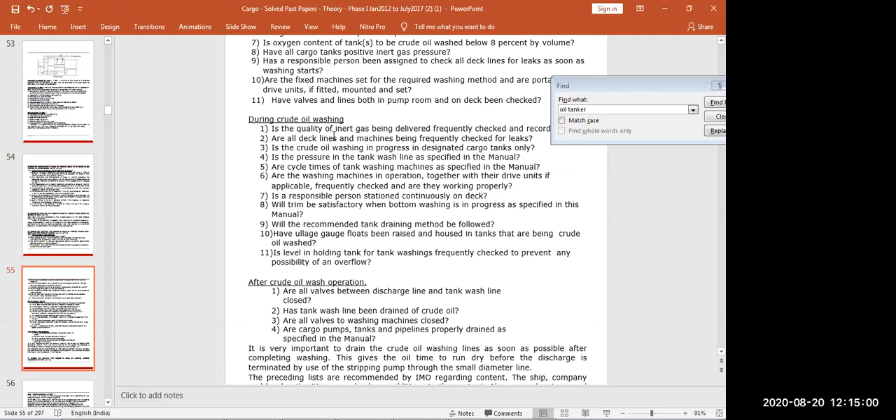Oxygen content, tank, pipeline leakage, inert gas, all these things are there. Then during crude oil washing, again inert gas, pressure, lines check, start slowly. After crude oil washing, closing and securing and stripping and draining.

Then hazards associated with crude oil washing: oil leaks, then can be explosion, inert gas, contamination and overflow. Again, the checks during and after crude oil washing.

Then you are chief officer of crude oil, explain the proper sequence of discharging and crude oil washing. So discharging, we have seen in brief. First, we arrive at the port, all information exchange, ship shore safety checklist, berthing, then general safety checks, all pipelines, alarms, leakages, pressure test of the line, gas meters, all paperwork, cargo documents. Then special attention has to be given to monitor the safe running of the pumps, pump room ventilation, pump room checks.

So pump room we have to see. Then drips and leaks in the pump room should be attended to immediately. Pump room bilge sounding should be monitored regularly. After completion of gauging,

sampling calculation, the terminal will give the readiness for receiving the cargo. So cargo sampling will be done before discharging. Then lineup checked, steam turbines checked for COPs, IG plant running. All these are discharging procedures.

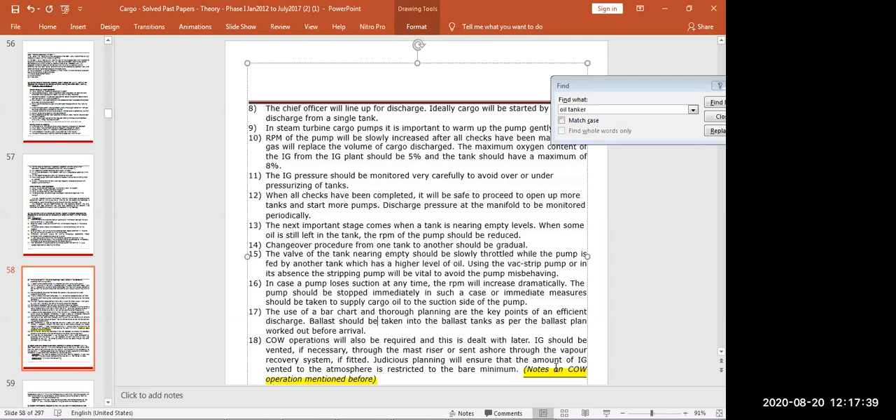Then there is a bar chart, we saw in that. This bar chart is showing which ballast and pumps are running at the time, and crude oil washing as required in the above checks. Then what is open cycle and closed cycle?

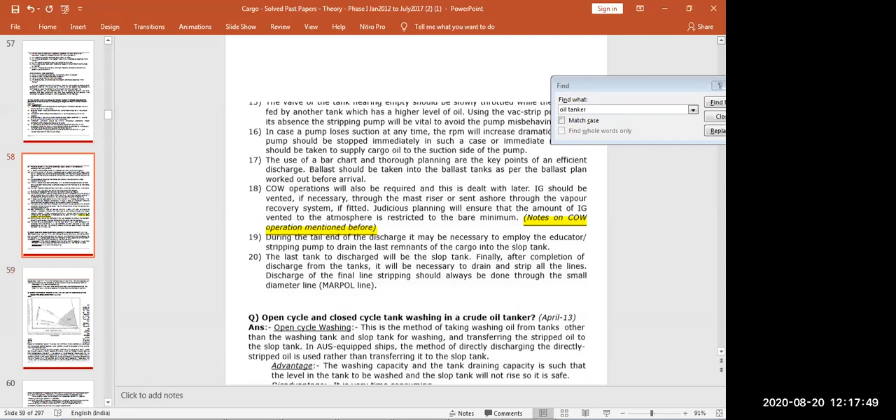Open cycle is vapor is vented in the atmosphere. Advantage is that washing capacity is increased.

Open cycle is venting in the atmosphere with the automatic unloading stripping system. So the gas is extracted. We will see when we are seeing pump room, what is this AUS system. The advantage is when you are washing the tank, the washing capacity and tank draining capacity in the tank to be washed and the slop tank will not rise. So it is safe, but it takes a lot of time.

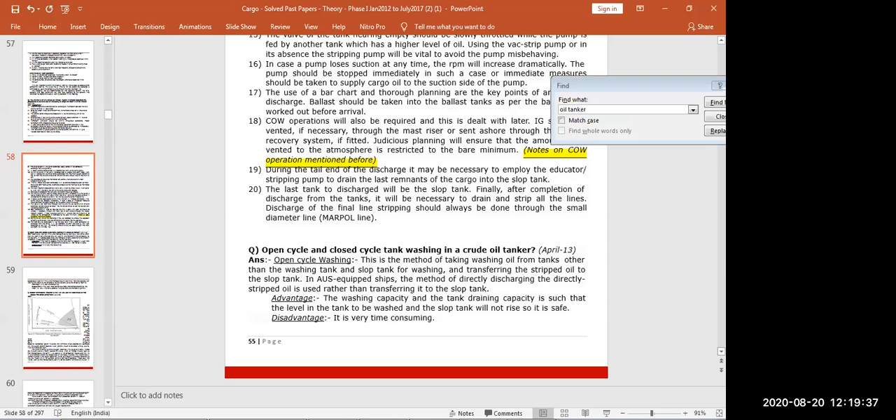So what is open cycle? Taking washing, you wash all the oil tanks from one tank and you put all the washing in other tank, and finally you collect all the washing from one tank, and put it in the slop tank, and then from the slop tank all the cargo goes through the automatic stripping system where it is stripped to shore. So this is open cycle.

So it is time consuming, but good washing and drainage is done. Closed cycle is a method of taking washing oil from the slop tank for washing and returning the stripped oil to the slop tank using the stripping machine. In open cycle, you were taking the crude oil from another tank, doing crude oil washing, and putting it in other tanks and finally the slop tank. In closed cycle, we are taking the cargo from the slop tank, doing the crude oil washing, and whatever residue is left, we put that also in the slop tank. Advantage is less time, but the wash water cannot be directly transferred ashore because there is a lot of water and oil in the tanks.

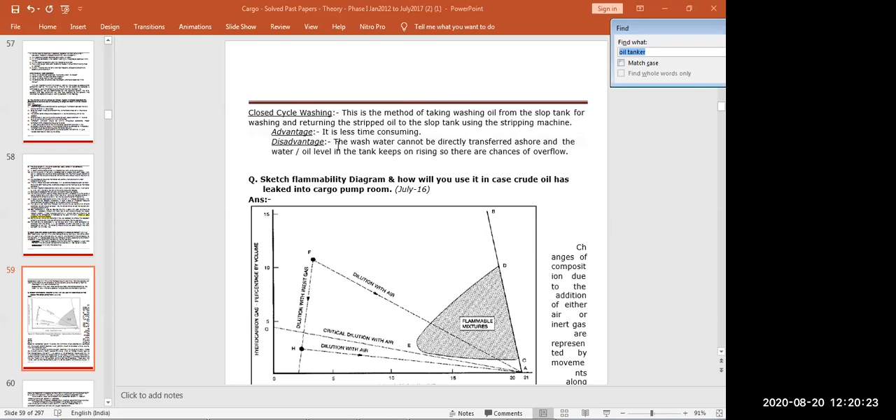That problem - the flammability diagram we have done.

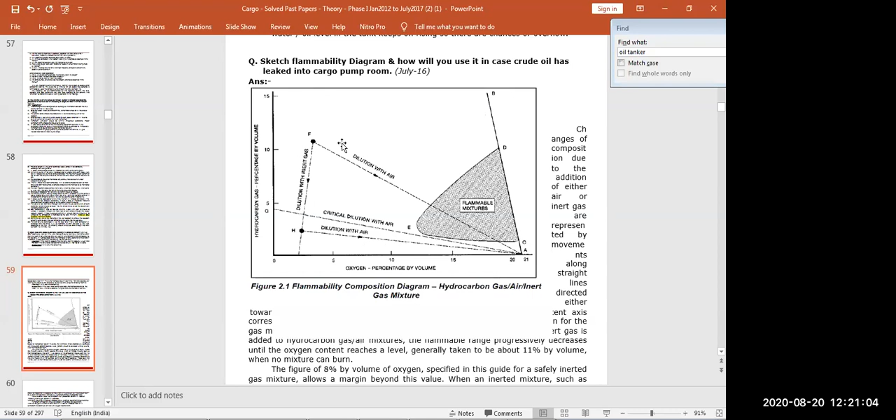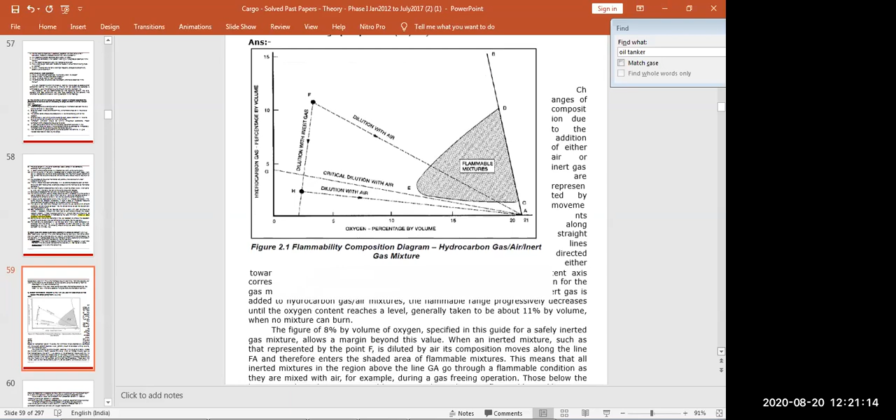So how will you use it in case you have a leak in the pump room? If you have a leak in the pump room, you will have a very high hydrocarbon content. So we will check the gas, and immediately start the ventilation, and if whatever cargo is there we remove it using the bilge pumps. And if anybody is there, we will not allow entry because we can enter the flammable range, so we will avoid any sparks or anything, and keep checking the gas and keep ventilating till the oxygen or gas level is reduced, and stop the cargo operation.

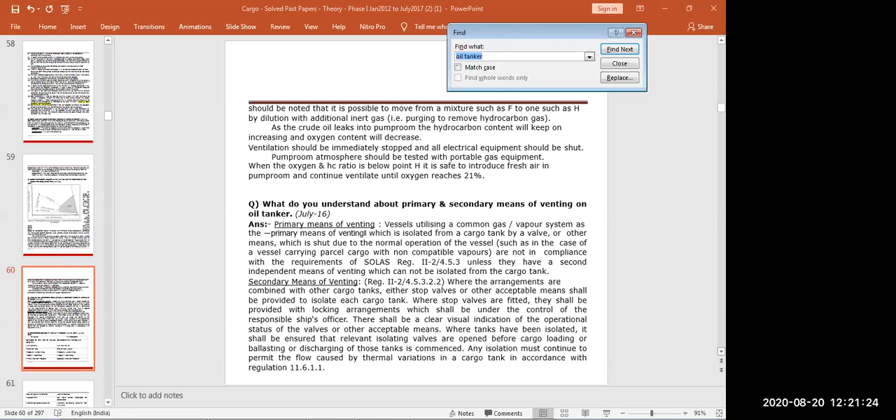Then the primary and venting system we saw just now - what are the primary and venting systems? Then PV breaker and PV valve.

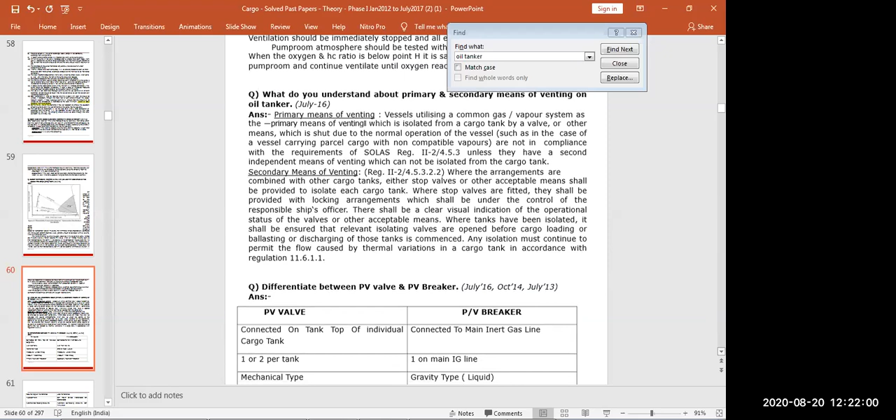Then the difference between PV valve and PV breaker - we have seen the PV breaker and PV valve, but if you want we can see again. PV valve is connected on top of each tank, PV breaker is in the common inert gas main line. You can have one or two PV valves per tank, but only one PV breaker on the full IG line. PV valve is mechanical type, PV breaker is gravity type, filled with liquid water, as we saw in the inert gas system. PV valve pressure is 1400, PV breaker pressure is 2100 millimeter of water gauge. PV valve vacuum side is minus 350, here vacuum is minus 700.

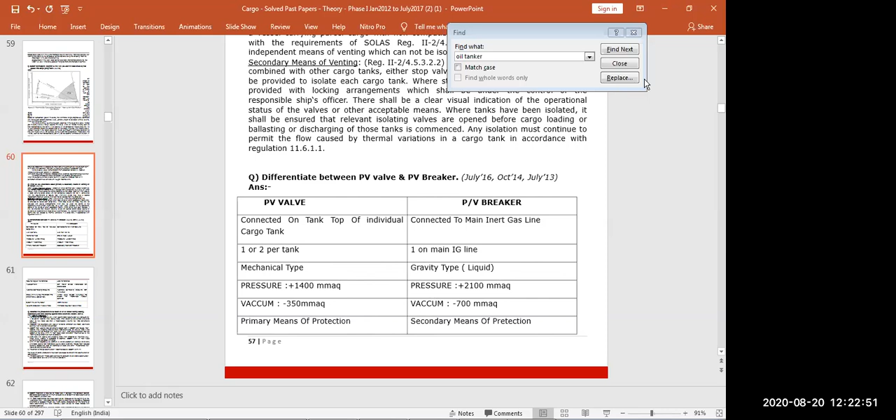So the PV valve will always lift first; if it is not lifting, then the PV breaker will lift, as you can see it has a higher pressure setting. PV valve is the primary means of protection. PV breaker is called secondary means here, but as per the definition of secondary means, other action shall be provided.

PV breaker is the first safety device of the IG system, but it's not the secondary means. For IG it can be, but for the tank, as you can see here, it should be able to isolate each cargo tank - it should be independent. But with the PV breaker, you cannot isolate each cargo tank, so it is not a secondary means.

They shall be provided locking arrangements and clear visual indication of the operational status. Where tanks have been isolated, it shall be ensured that the relevant isolating valves are open.

So the second PV valve or your sensors are your secondary means of protection. PV valve requires regular maintenance, PV breaker requires less maintenance.

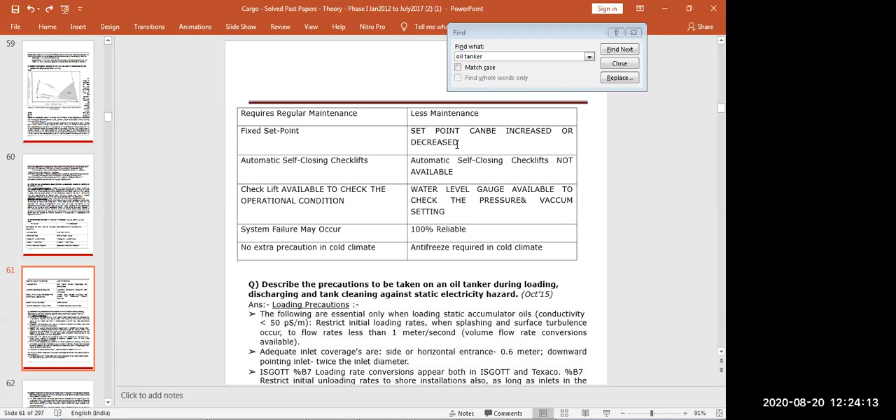PV valve is at a fixed set point, PV breaker's set point can be increased or decreased as per the water level. PV valve has an automatic self-closing check lift - if pressure is not there, it will close automatically. PV breaker will not close by itself; it does not have that, so you have to fill the water if it is drained out.

Then the check lift available to check the operational condition - in the PV breaker you have the water level gauge to see the operating condition. PV valve system can fail because it can get stuck. PV breaker is 100% reliable because it's all water - if pressure is increased, water will pump out. So it's very simple.

For PV valve, no extra precaution is required in cold climate. In PV breaker, we add antifreeze glycol in cold climate.

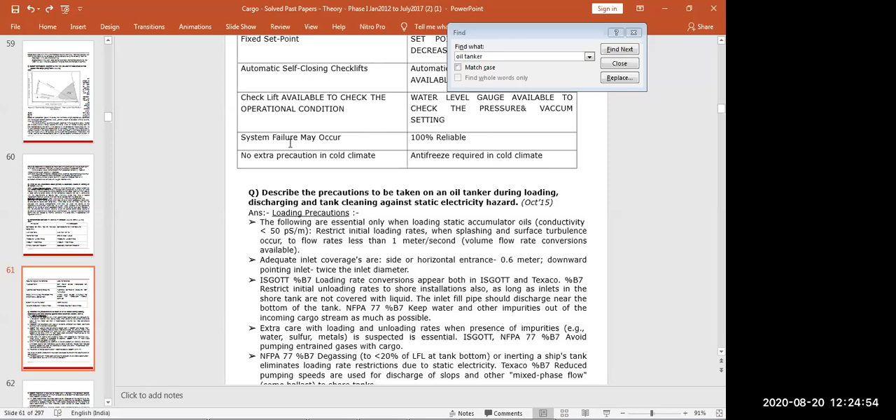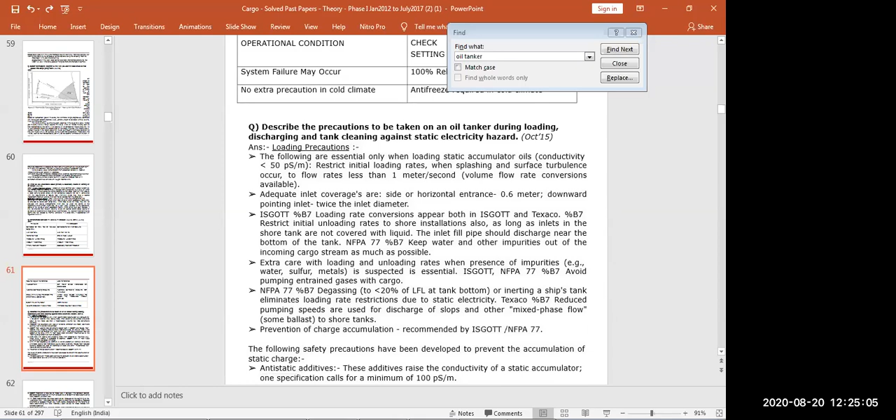And precautions during loading: we have to see static electricity precautions for accumulator oils less than 50 picosiemens, start slowly at 1 meter per second, then sampling, hose size, then loading rate, maximum loading rate 7 meters per second.

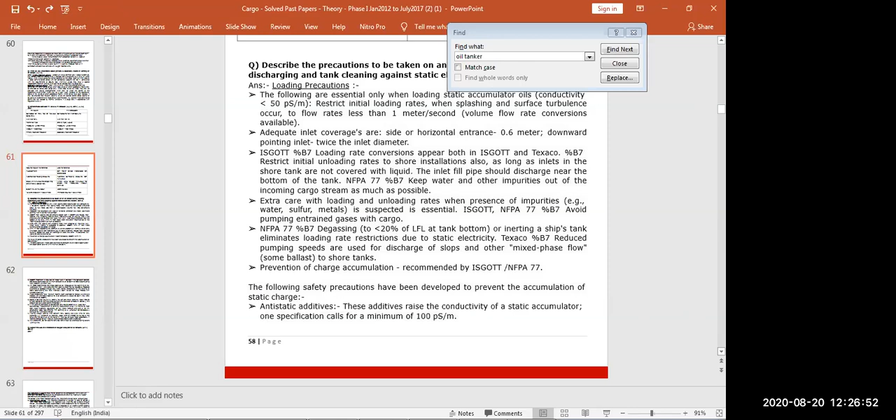Then you have to know the density of the oil, and the people operating should be well skilled, with good earthing, and settling time after 30 minutes after loading is finished. And in bad weather or lightning, don't do full rate of discharge, reduce the rate.

And for oxygen analyzers, we have paramagnetic sensors or electrolytic sensors, two types. Paramagnetic sensor works on magnetic properties. A metal body is suspended in a magnetic field, and when the gas is drawn through the cell, the suspended body experiences magnetism. So there is a metal which experiences magnetism in the presence of oxygen, and the amount of oxygen present determines how much magnetism will be there, which is measured.

Electrolytic sensor: current flows because of electrodes with the electrolyte. More oxygen means more current flows, less oxygen means less current flows, and based on that we get the readings.

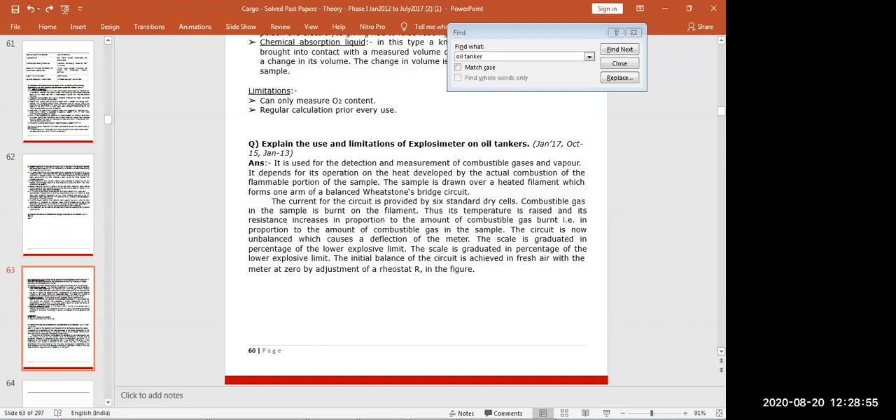Then explosive meter. What is the limitation of the explosive meter? We can use it only when oxygen is more than 11%, that is, we cannot use it in an inert atmosphere. We will use it when we are doing gas freeing.

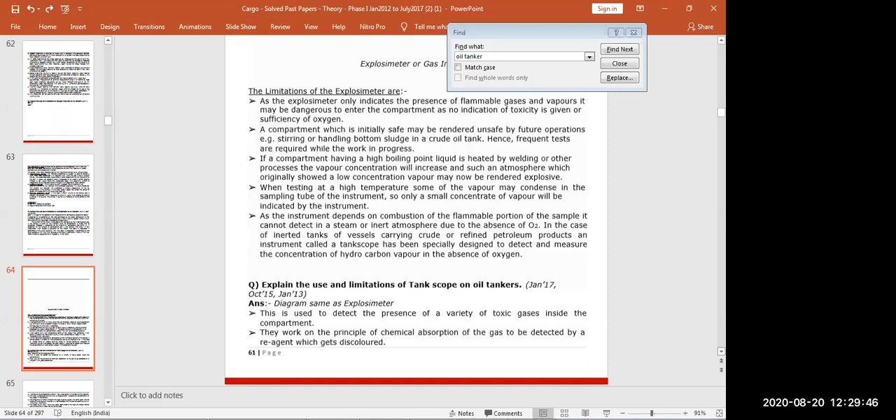Yeah, we need tank scope. This is the tank scope which we will use for inert atmosphere.

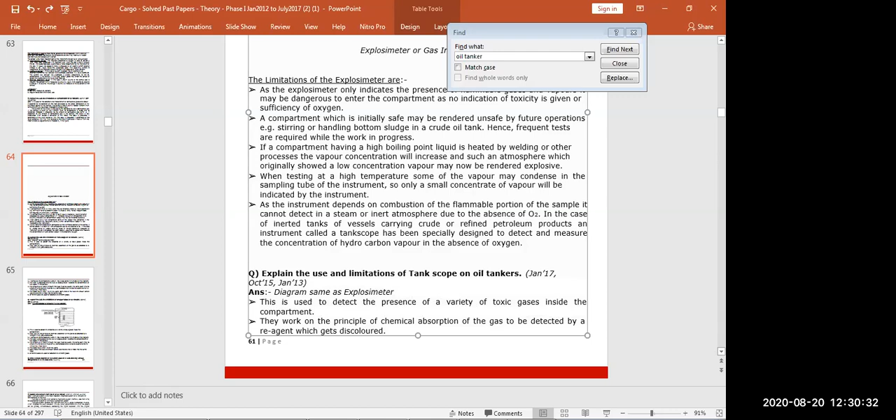So tank scope works on Wheatstone bridge, chemical absorption.

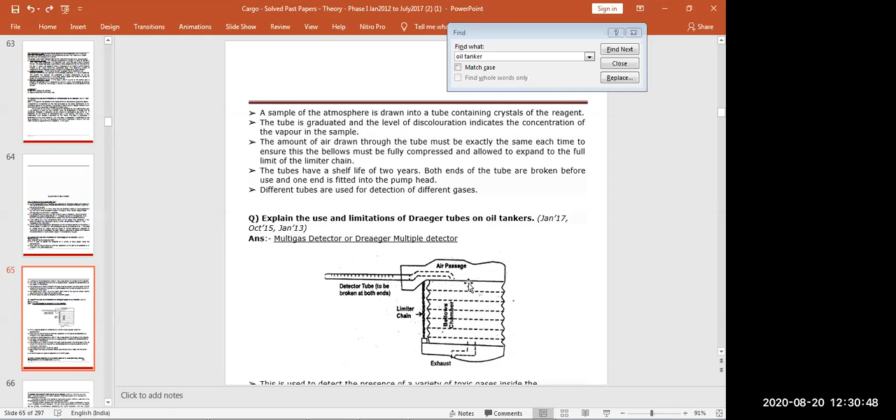So this is different. Then explain the limitations of the Draeger tube. So with the Draeger tube, you put it in the pump, and measure the number of pumps, and you get the discolouring and color change and all.

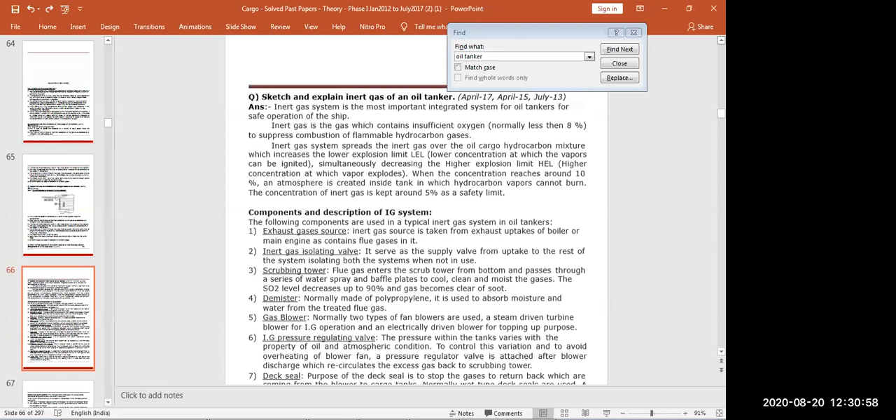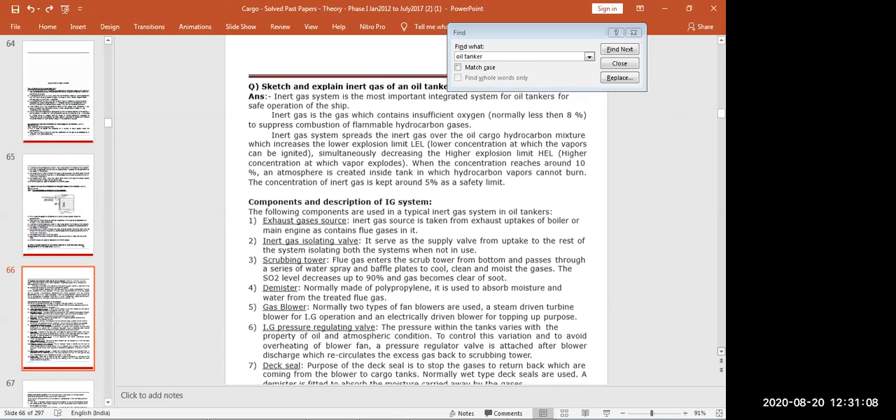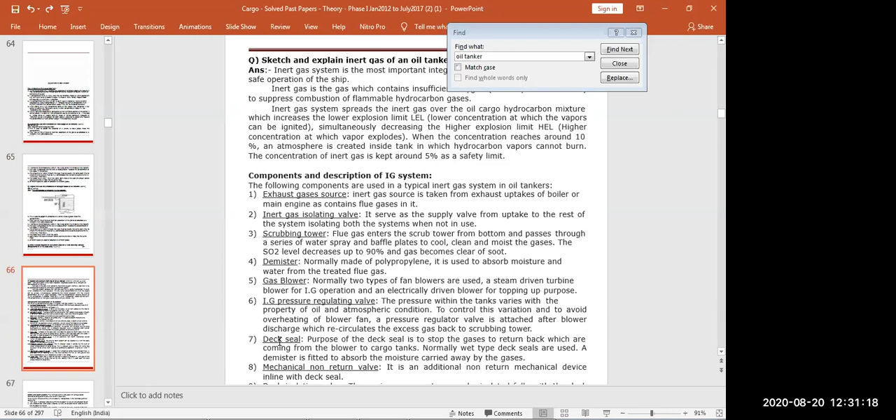Then block diagram of IG system, you were asking about a VLCC, and all the components. So first we have to name all the components like this: exhaust gas source and valve, boiler, isolating valve, scrubber, demister, gas blower, fans, IG pressure regulating valve, deck seal, then non-return valve.

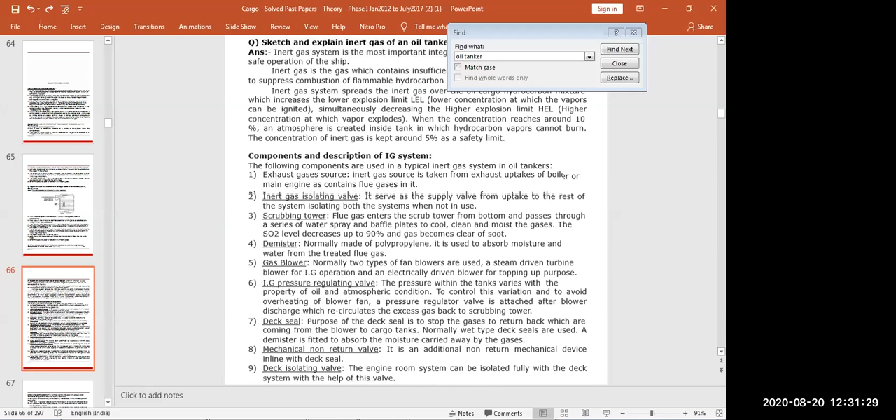Then deck isolating valve, PV breaker, cargo isolating valves, and last is the mast riser.

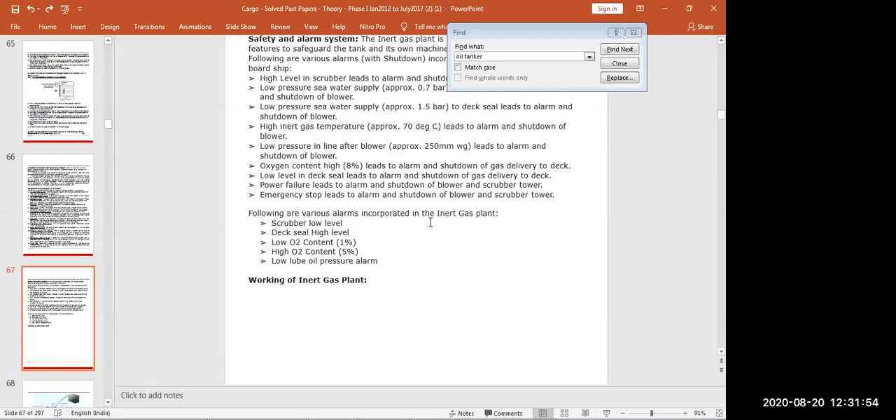Then the alarm system, which we saw: scrubber water level high and low pressure, blower shut down, low pressure inert gas, high temperature, low pressure in the line after the blower, oxygen content high, deck seal high and low water level. So all these are alarms of the inert gas system.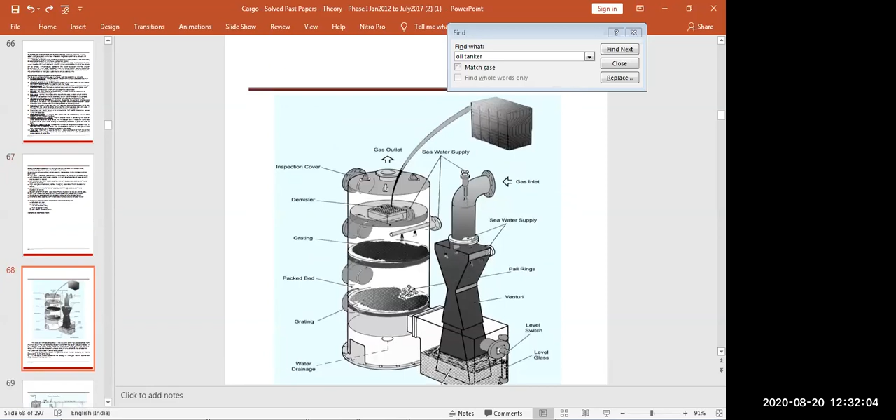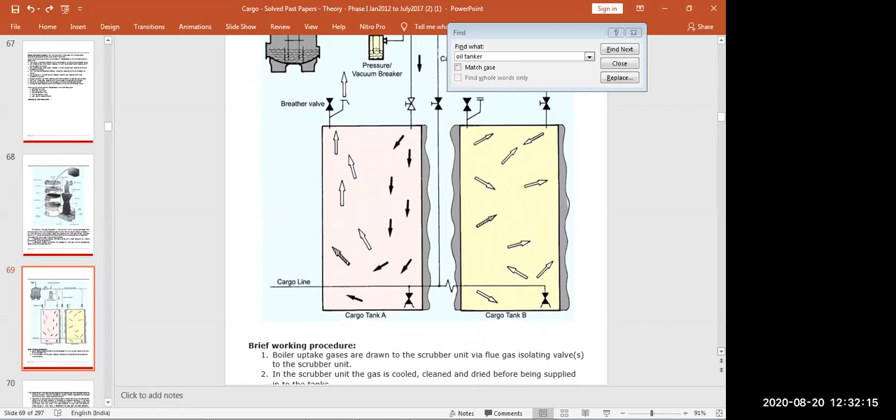So this is the diagram of the inert gas system and its explanation. Inert gas is going into the tank after the PV breaker. Then the full explanation, and then the hazards of this, this is...

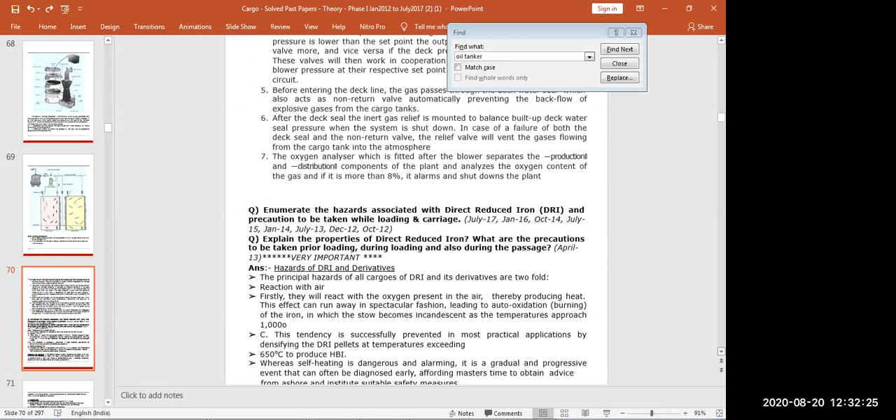Also there is an oil tankers question: what is dirty ballast? If the discharge is composed of seawater and discharge from fuel tank, so if you take ballast in a fuel tank, or seawater in a fuel tank for the stability of the vessel, that is your dirty ballast. Maybe in fuel tank or...

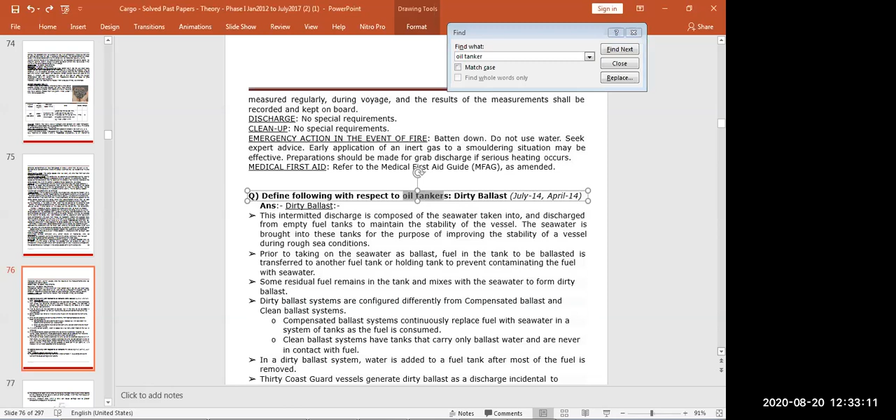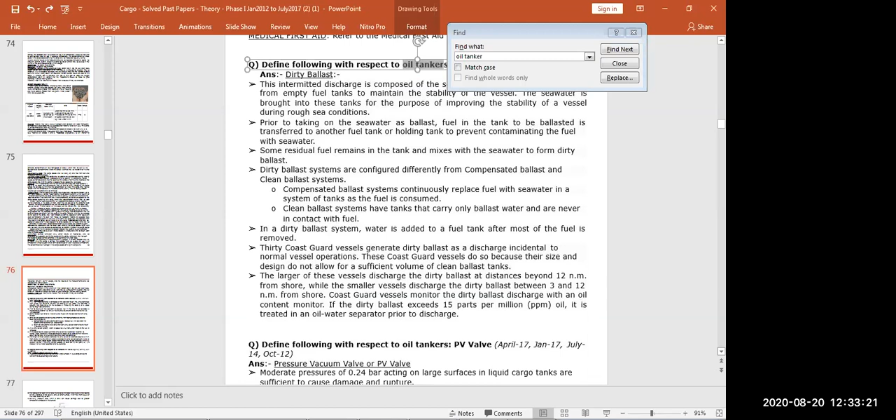Then, what is a PV valve? This we have to see. The PV valve is operating at 0.24 bar pressure,

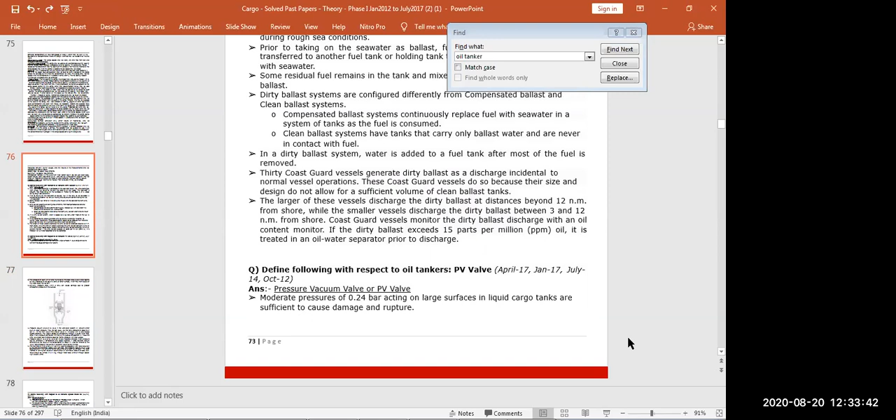sufficient to cause... This is a PV valve operation. There is a seat with the spring and you have a weight, so this weight will get lifted. We will see a better picture. So if the pressure in the tank - this is connected to the cargo tank - if pressure is increased, this valve will lift and the pressure air will release.

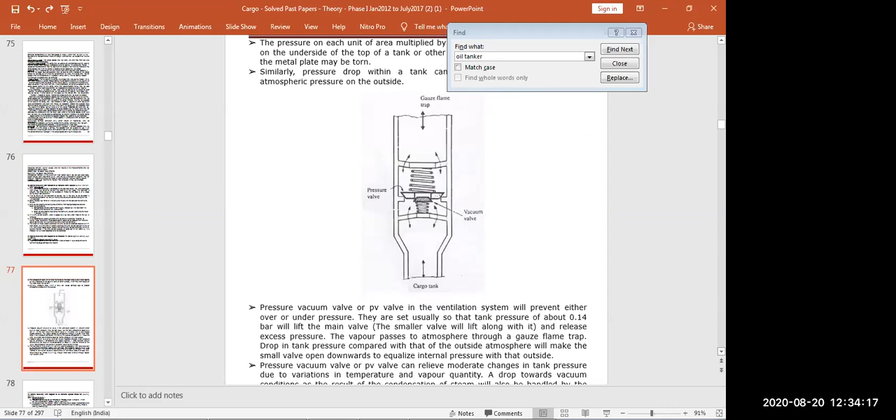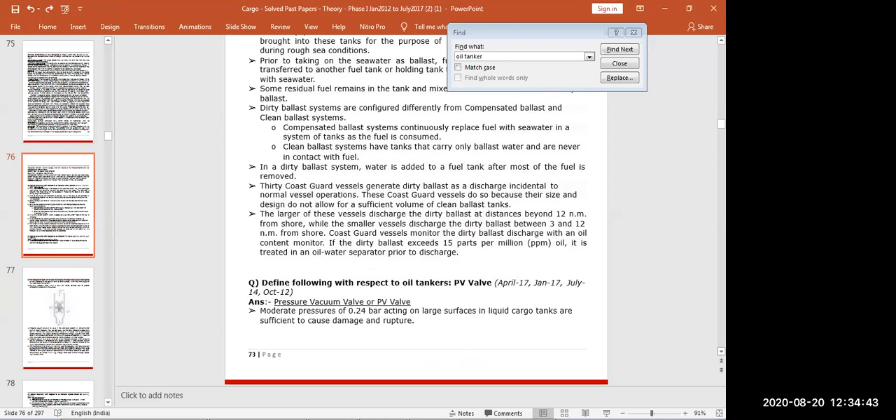So if in any tank you have more than 0.24 bar pressure, the tank will get rupture. So before 0.24 bar, your PV valve should lift. It should lift before 2400 mm.

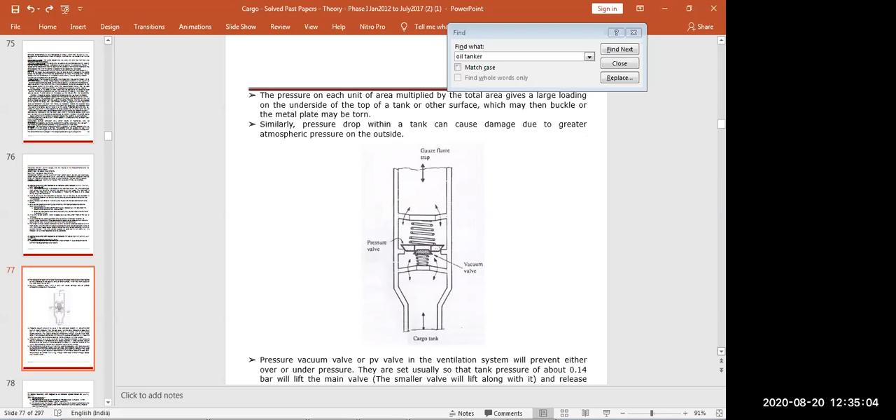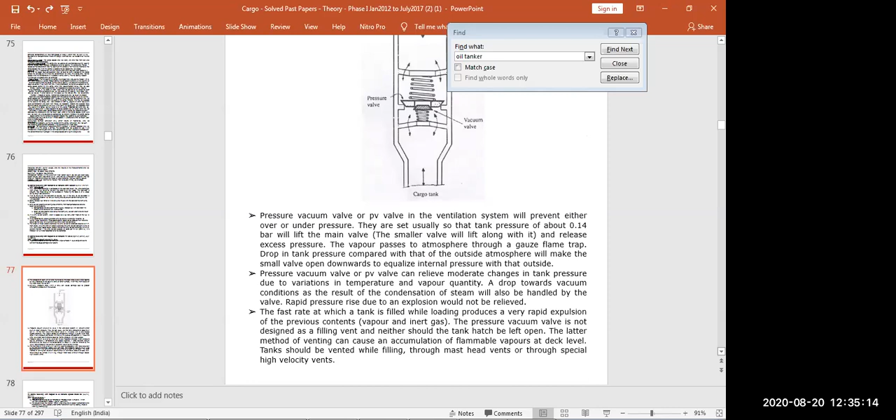So PV valve is a part of your ventilation system, to avoid rupturing of the tank.

Then what is spike crude oil? Spike crude oil is enriched oil or tailored crude oil, which has more hydrocarbon added in gas or liquid form. So extra hydrocarbon is there, better to improve the quality or something. Large amount of added hydrocarbons and it has got heavy gases.

Then sour crude oil. Sour crude oil has more hydrogen sulfide. When the total sulfur is more than 0.5, it is called sour crude oil, and if it is less than 0.5, it is sweet crude oil. So nowadays we require less sulfur, so if we need better quality oils, we have to purify the sour crude oil to make it less than that sulfur content, and that is called your sweet crude oil when it has less sulfur.

Because sulfur is harmful to the environment and causes global warming.

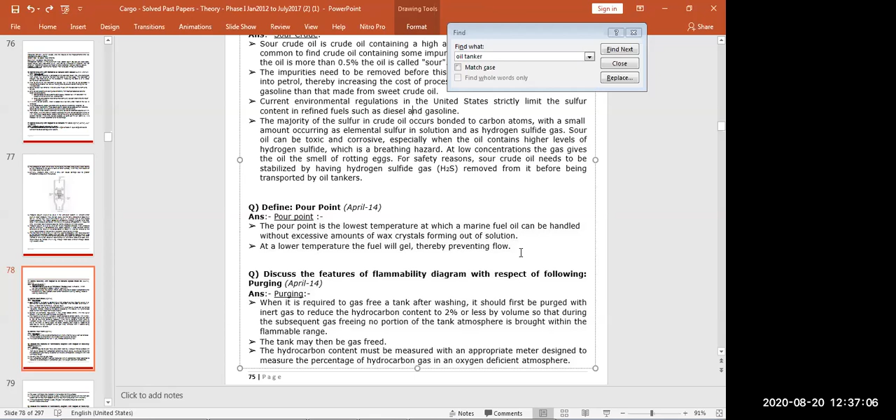And pour point: when any substance at that temperature starts flowing from the waxy state, is the lowest temperature at which oil has excessive wax forming out of solution. At low temperature the fuel will get thick, thereby preventing the flow. So if the temperature is lower than the pour point, the liquid will not flow.

So, the flammability diagram.

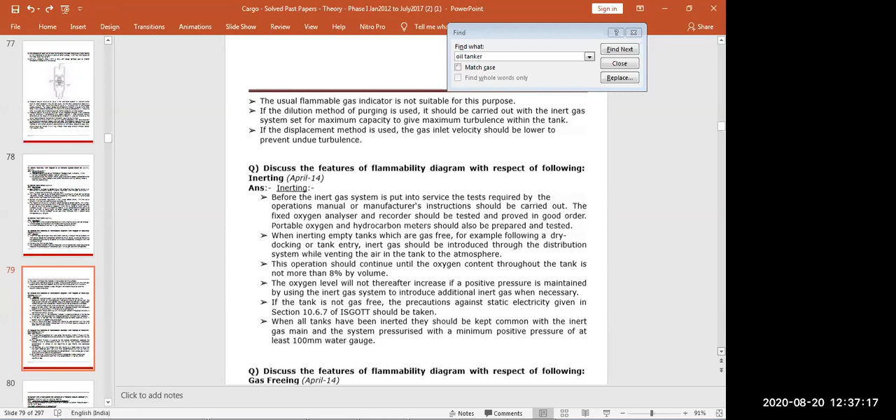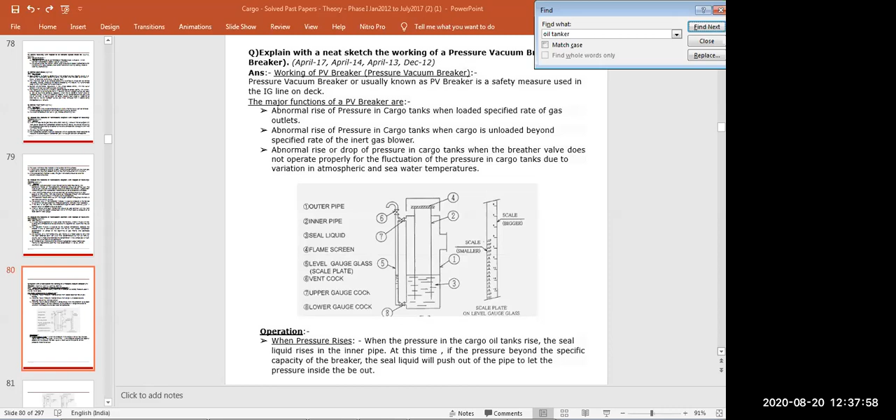So the PV valve we have already seen - PV breaker, sorry. So, how it is the same.

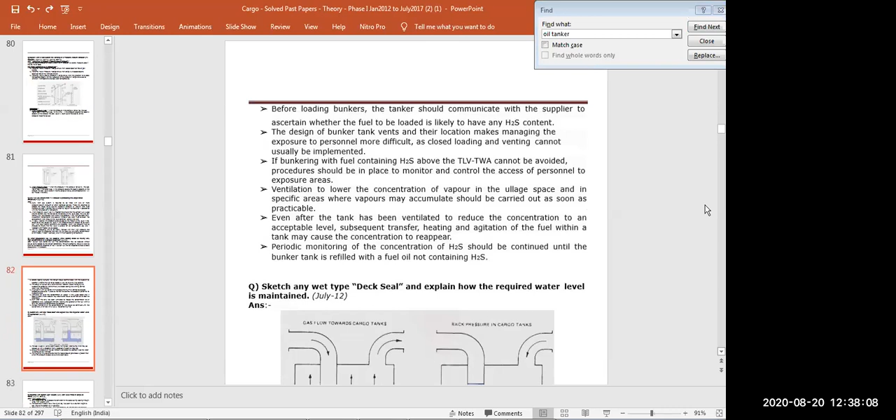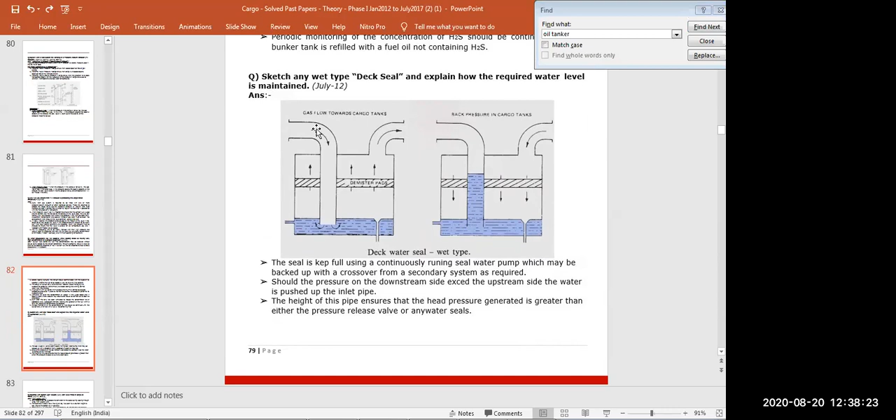Then deck seals. This we had to do. So good, we come here. Different types of deck seal. First is this one, the wet type of deck seal. Wet type means gas is passing through water. Mostly this one is used, we saw it in the video also. So inert gas is coming and it is passing through the water and getting cooled down, and the gas is going to the cargo tank.

Now if there is backflow, the gas is coming back. So you have the demister pad also, so that if gas is going, moisture is absorbed. When the gas is coming back, because the gas is lighter than water, it cannot push through the water. Some water it will push, but it cannot pass through the water. So it will push the water and this tube will be full of water, so gas cannot go back. This way the wet type deck seal is preventing the backflow.

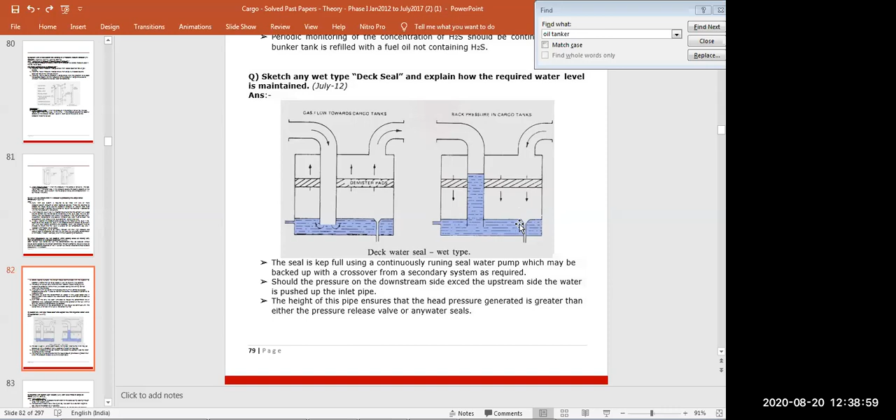Then the high velocity vent valve. This is the design. The requirement is that the velocity should be at least 30 meters per second - the shape should be such that air is going up to 30 meters per second, and the height of the PV valve should be at least 6 meters. So with this calculation, the fumes which are coming out will be very high and will not come onto the deck.

Tank vapors can be released and sent clear of the deck. Main thing is high velocity to avoid air accumulation on the deck.

This is a moving orifice type PV valve, and this is the counterweight. You can see the moving orifice and fixed cone or counterweight. There is a small gap between the orifice lip and the counterweight.

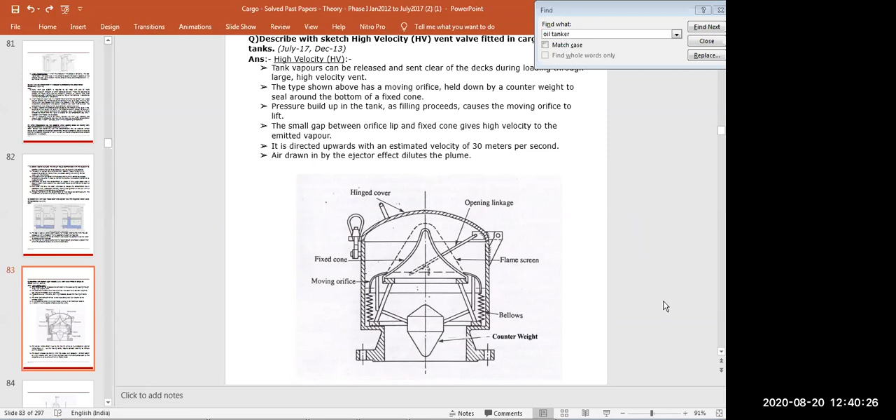It is directed upwards with velocity 30 meters per second, and air is drawn in by the ejector effect. This way the gas is passing.

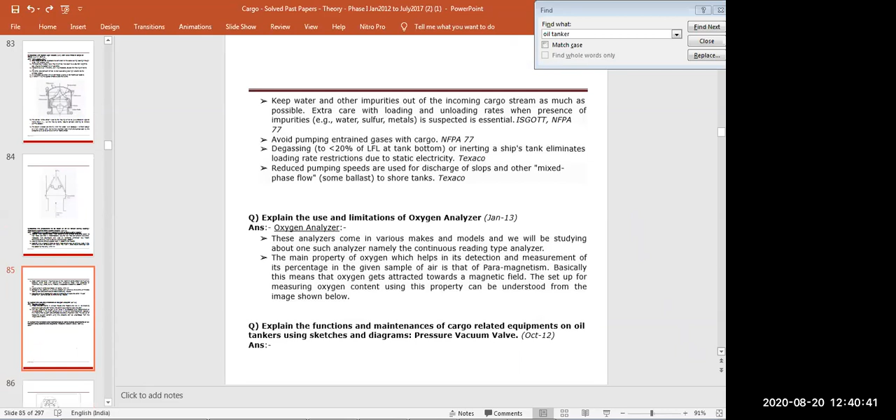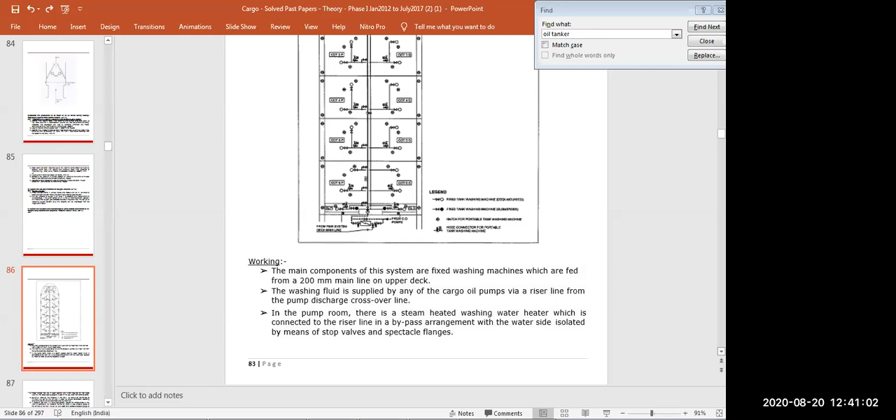Precautions for loading, gas charging, oxygen analyzer, cargo related equipments. You have ODME and the pipelines. Then function and maintenance of cargo related equipments.

ISGOTT - this is what we were going to do. That's the last topic we ended. So sometimes you are asked to write short notes on ISGOTT, or what is ISGOTT.

The latest edition of ISGOTT is the 6th edition, with many new amendments, 2020 edition. It was first published in 1978. It is a guide - not mandatory - for safety of oil tankers and terminals: International Safety Guide for Oil Tankers and Terminals.

It is divided into 4 parts: one part is for the tanker, one part is for the terminal, one part is for port and terminal interface, and the fourth part is for other safety aspects. It is published by OCIMF, Oil Companies International Marine Forum, and ICS, and one more, IAPH.

As per ISM, it lists all the safety measures for loading, discharging, tank cleaning, venting, sampling, static electricity, gas meters, cyber security, and work permits. All these things are given in your ISGOTT. Any work, any aspect of safety of oil tankers is given in ISGOTT.

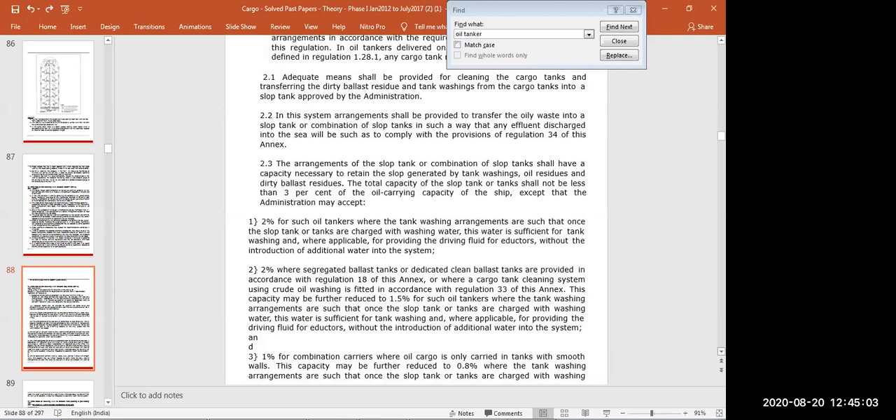Yes. Yes. Shyam? Yes sir.

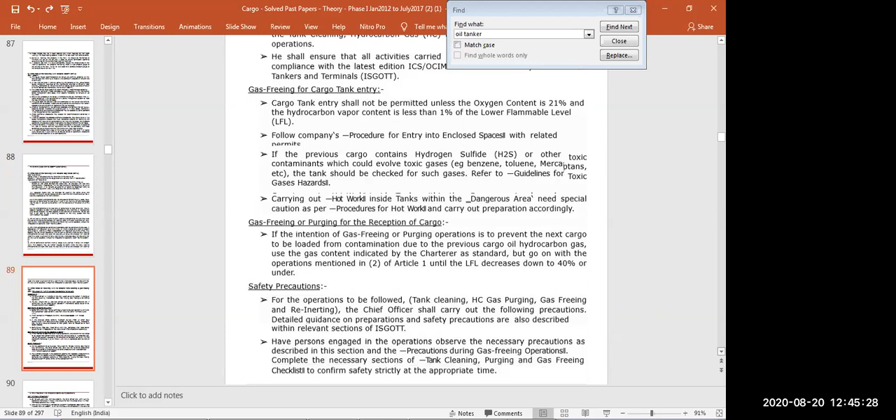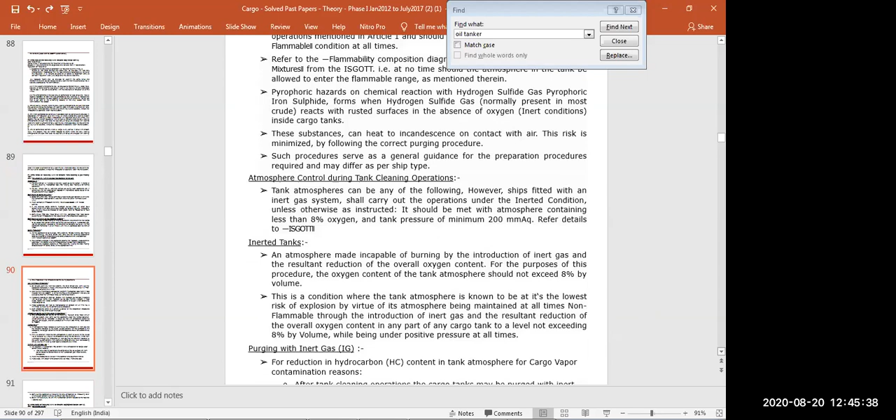Yes, slop tank arrangement is separate. Even if you do crude oil washing, you will collect all the slop or oily water mixture in one tank - that is the slop tank. If you are going to dry dock or some other repairs or inspection, where will you collect the tank washing?

Time is up, and that's most of the questions we covered. There are some definitions - what is Reid vapor pressure and all.

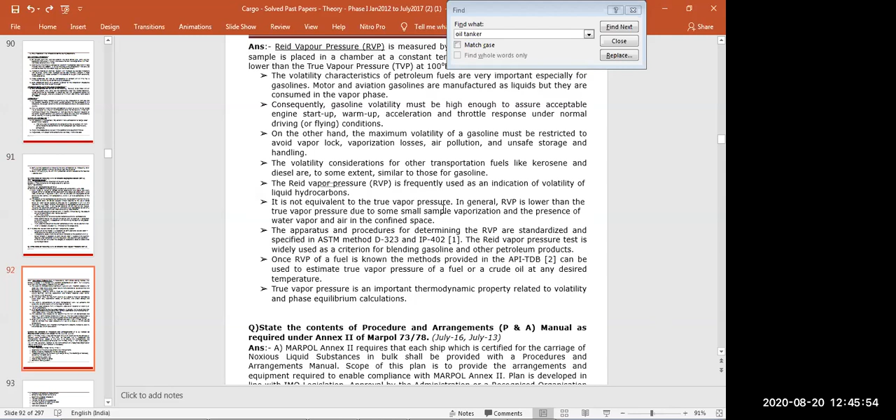Don't know, maybe I will ask. Good question. A small question is there.

What? No, it's the difference between mmAQ and mmWG. I am not able to hear you. Sir, what's the difference between mmAQ and mmWG?

MSW and MLW - no, MMAQ and mmWG. mm of water gauge, and mmAQ is of aqua. Yes, aqua means water, so both are the same thing. Both are same thing. Okay, yes.